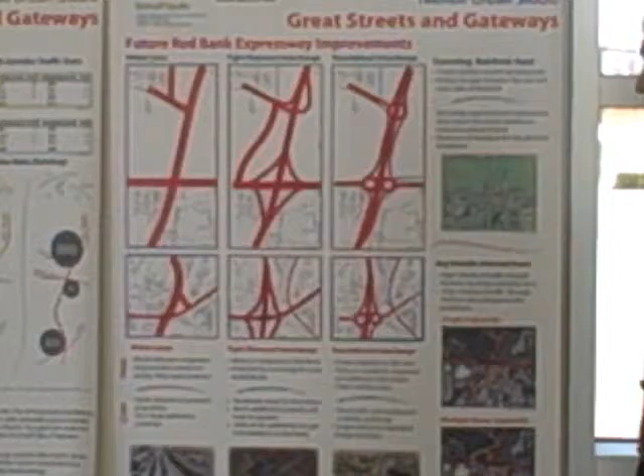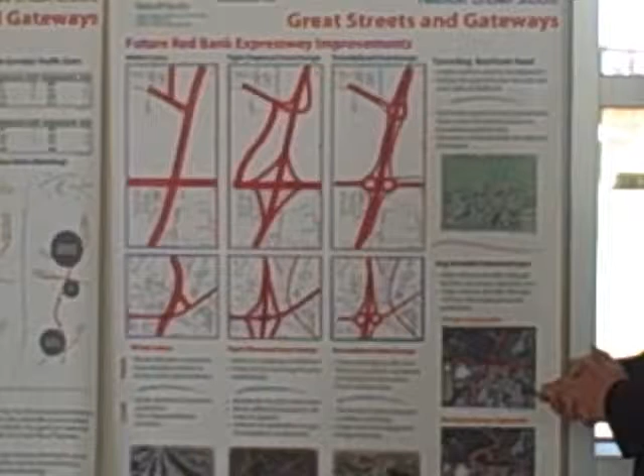With the grade separated intersection, it really becomes difficult to get those pedestrians across safely. Our final option that we've been looking at this quarter is the roundabout interchange. What this would do is add 3 different roundabouts, one at each of the different intersections.

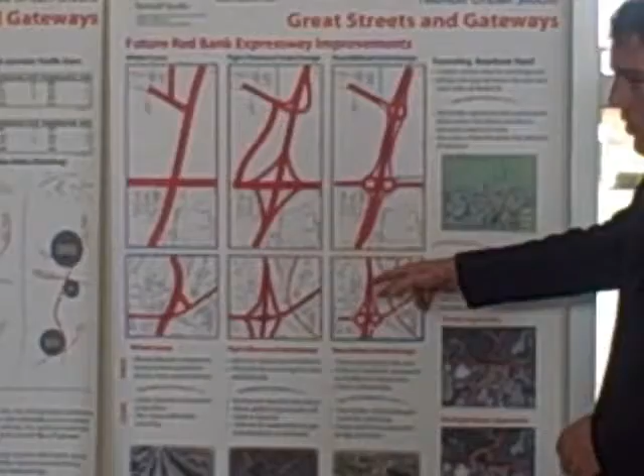And as you can see, we have a single roundabout, and then the Madison and Erie Road intersections utilize a double or teardrop roundabout. Just like we explained here, traffic from the north coming from 71 could access Duck Creek from here. In the PM, Duck Creek traffic can go around the roundabout and back up.

Any of the traffic coming from Duck Creek connects with what comes off of Red Bank to Madison here, and they can access Madison Road or free flow down through Madison Road. With this double or teardrop roundabout here, traffic can move freely through on Madison Road or access south, access north, and then from the other side as well.

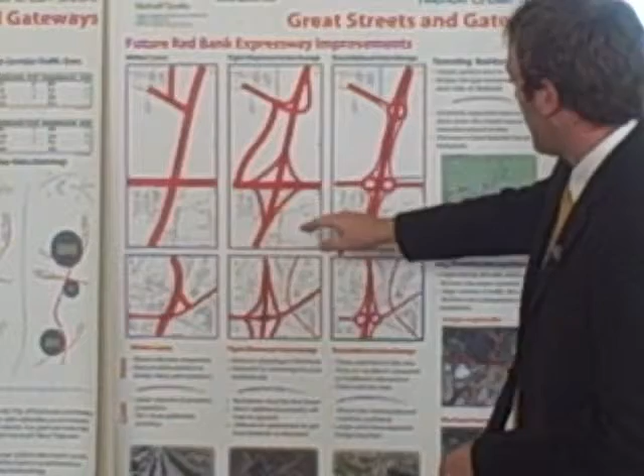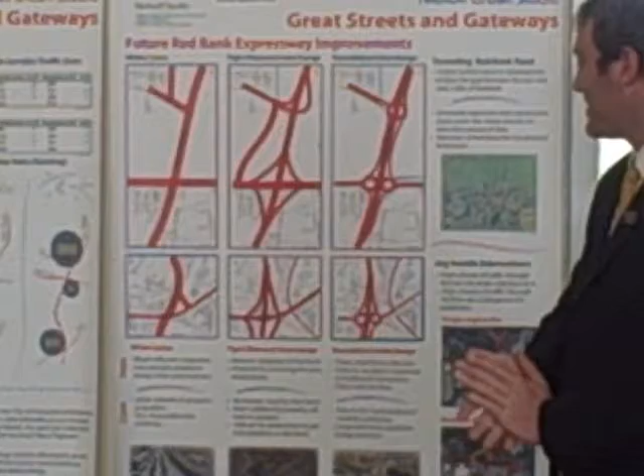And just like we see with the second option, this really gives you the opportunity for free flow through all the intersections. You're looking at the same thing also down here with Erie Road. One of the things that has been expressed about roundabout interchanges is that the community is somewhat reluctant to accept them. Basically, I think it's based on it being a new experience. It's something that people haven't had a lot of exposure to.

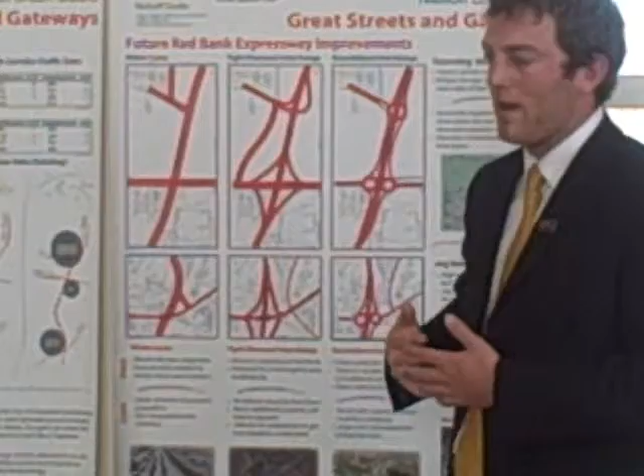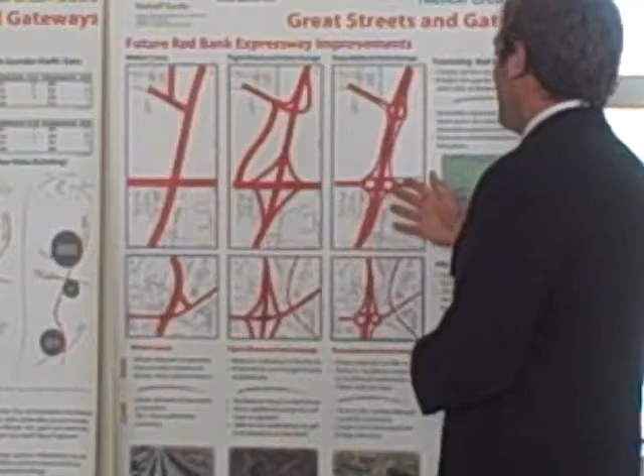And when you throw that at people, I think the initial reaction is to be a little reluctant to accept that. So that's maybe one of the cons against that. But really, I think that the roundabout would be a unique factor that would maybe give Madisonville something to rally around. It would maybe make them a unique community; people maybe are not drawn in by the roundabouts, but it's something that will maybe pull people out.

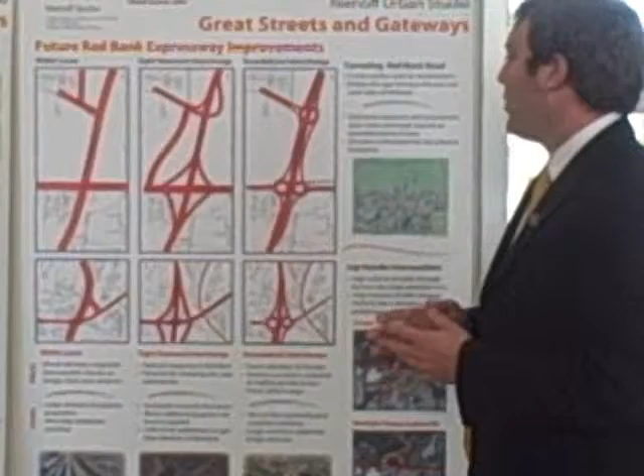Another con too, the same with the tight diamond interchange, is that when you're looking at grade separations, it's becoming considerably more expensive, even with acquiring the property, than just widening one lane. You have to think about the different property that you're going to have to buy, especially with this connector. There's significant property you have to purchase.

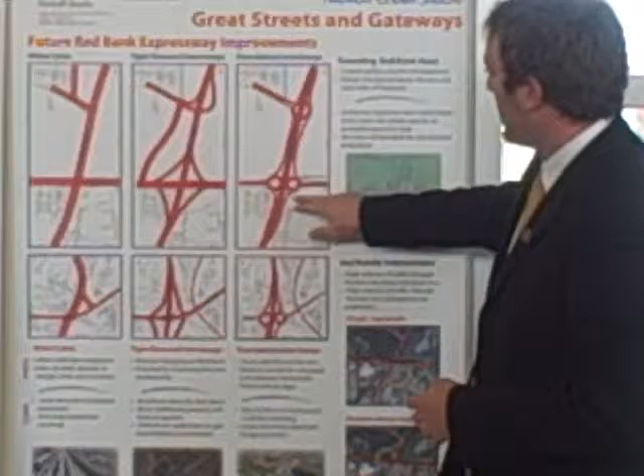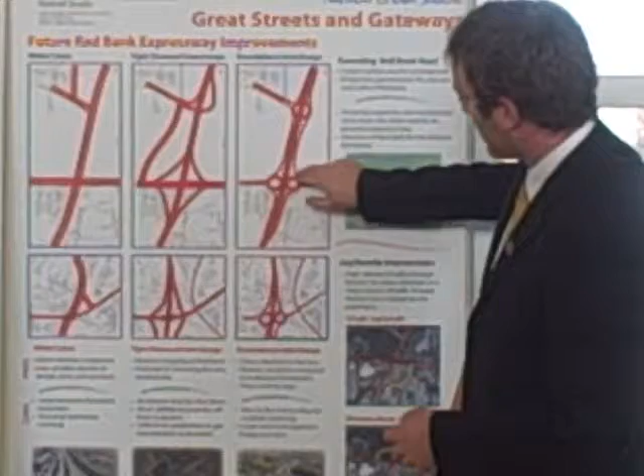But even here, with the roundabout, you're going to have to acquire property on all 4 corners of Madison Road. The reason we believe the roundabout is probably the best option right now is that the property is less in these different connectors than it would be with the tight diamond interchange. So it's a tighter footprint for those different types of intersections.

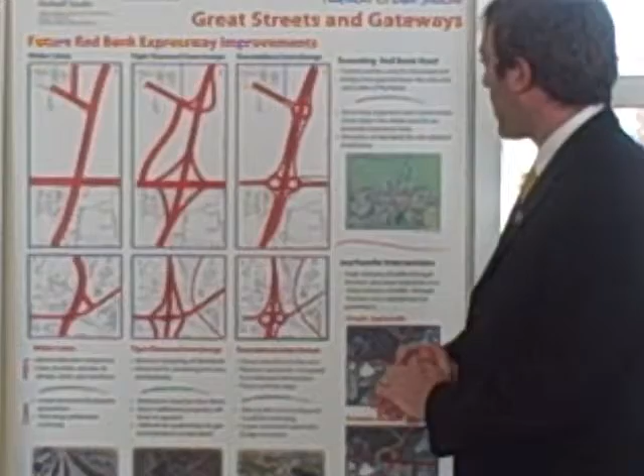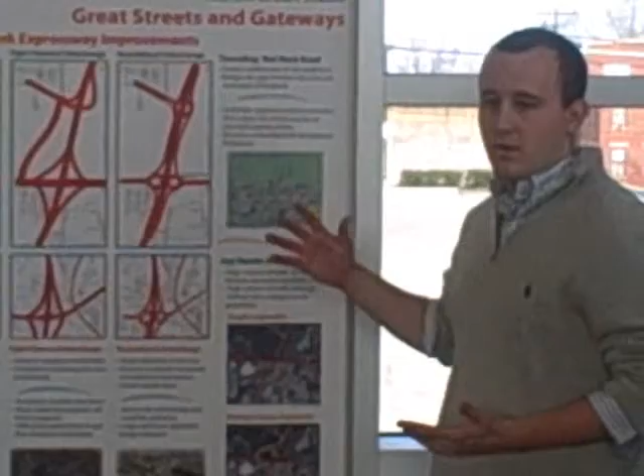So those are our 3 main intersections, and I believe Josh will be talking about some of the other options we looked at. Okay, as Jordan just mentioned, we covered 3 main options that looked at the whole expressway. And through different planning groups that were looking at the Newtown site, we more specifically concentrated on the intersection with Red Bank and Madison and what it would do to the Newtown site.

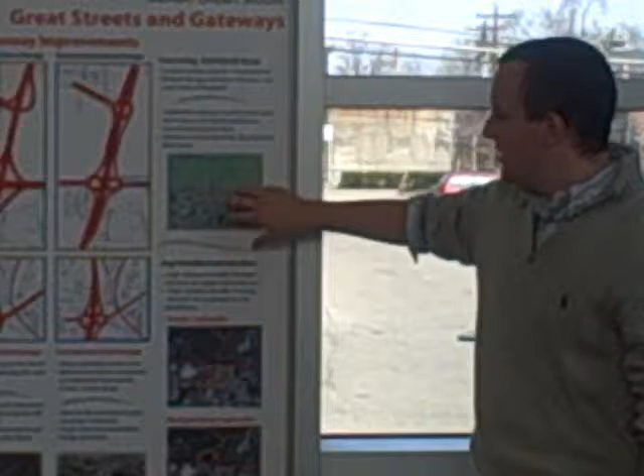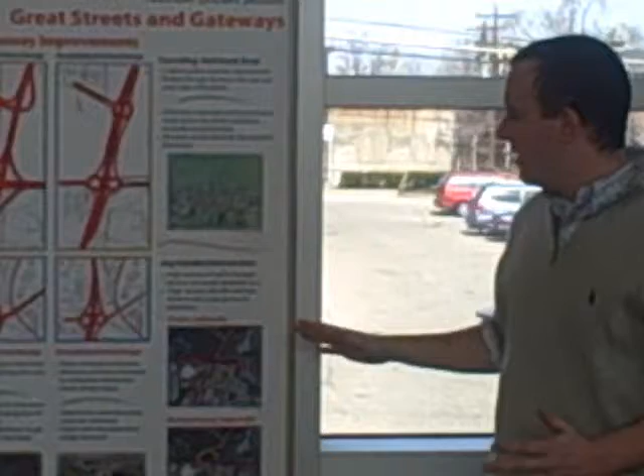So we communicated with them and got hold of a couple of their ideas, and we wanted to take a look at them and put our opinions down. The first option specific to Red Bank and Madison is tunneling Red Bank under Madison and reconnecting Old Red Bank Road. This option does a significant amount as far as planning goes. It starts to reconnect the old street grid, it creates a nice space, and it passes all the Red Bank traffic under there without really being noticed.

However, it's technically a tunnel, with safety issues and extreme costs. The elevation of Red Bank Road physically limits what you can do. You really can't lower Red Bank Road because of the culvert that runs under it.

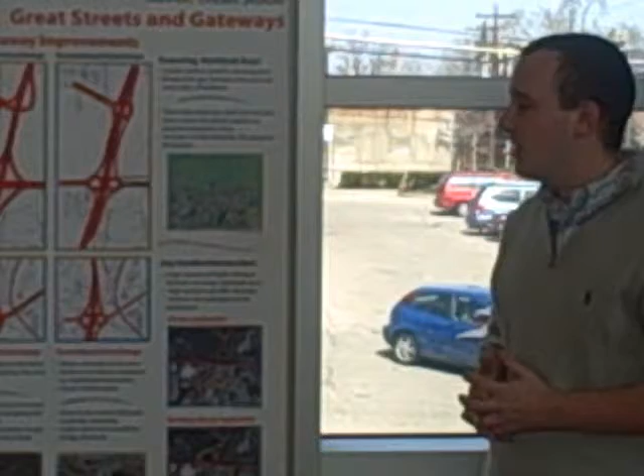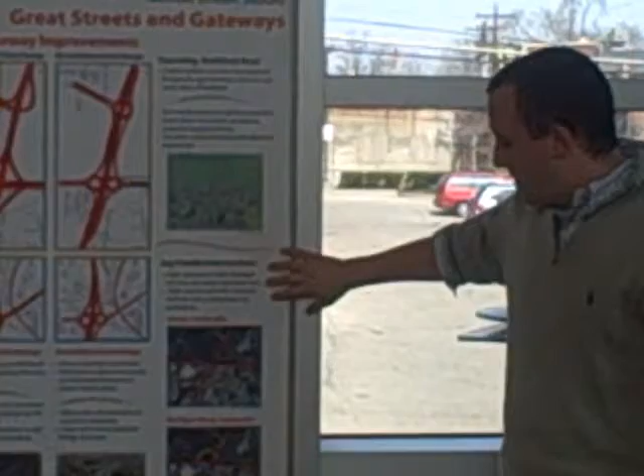So you would be building up that whole area. And we feel that the cost of that is pretty much a prohibitive action. We also were made aware of two jug handle options that some of the groups were looking at.

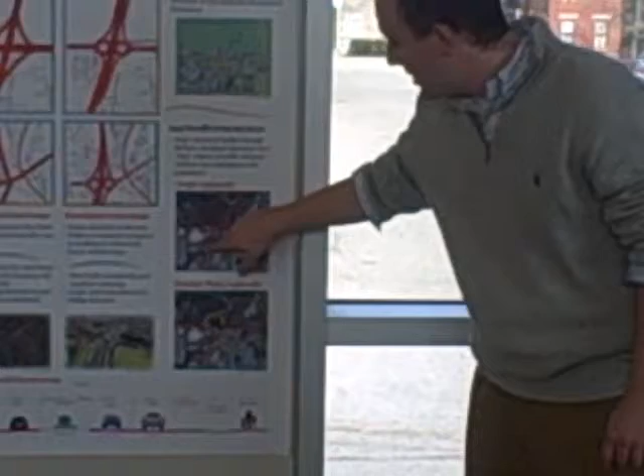The first is a single jug handle, which is extremely similar to what we looked at last quarter, that is going to be implemented at Popple Street, which essentially all the traffic wanting to access Red Bank Expressway would use the jug handle that would guide them through the Newtown site, bringing traffic to the Newtown site, which was their goal with the jug handle.

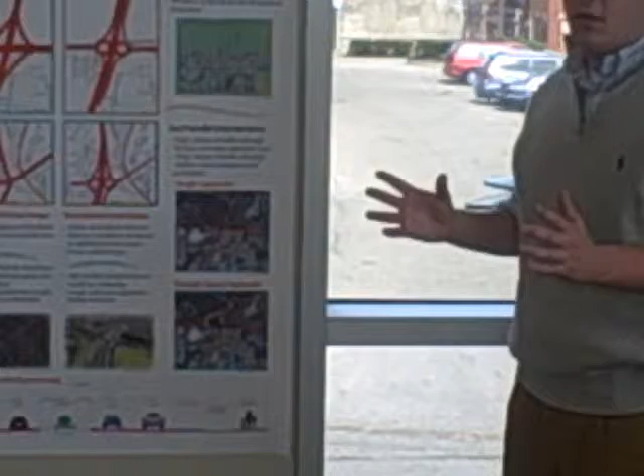However, we kind of feel that the problem is that you're essentially just moving the intersection from here down to here, and you're not really letting any more traffic pass through Red Bank Expressway than you would with keeping the intersection here. So also bringing an on-off ramp kind of mentality through the Newtown site we don't think is the greatest idea for pedestrians as well.

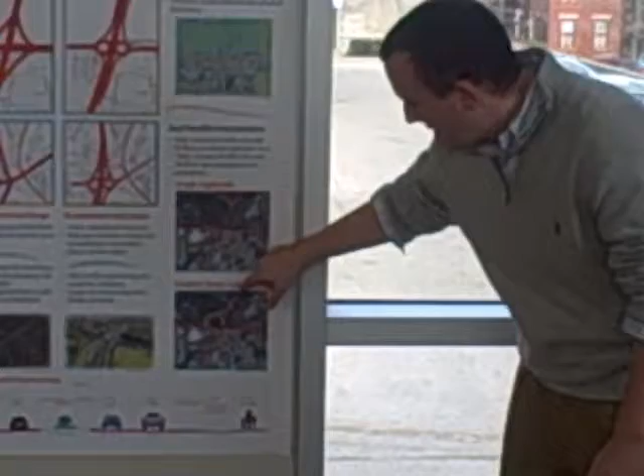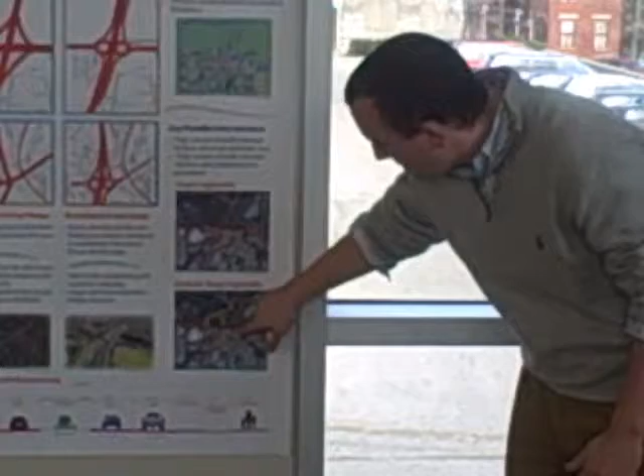The multiple ramp jug handle kind of creates something similar to a normal ramp system, except you only use up two of the four quadrants. Again, you guide traffic through the Newtown site, but you also end up taking up space from the children's home, and we know that that's a sensitive issue. They don't really want to give up their land.

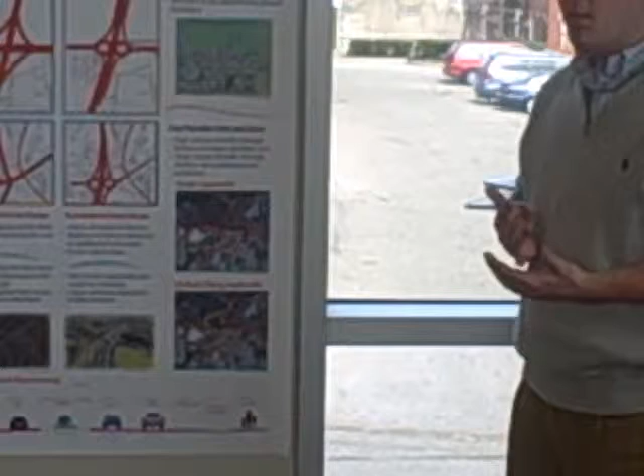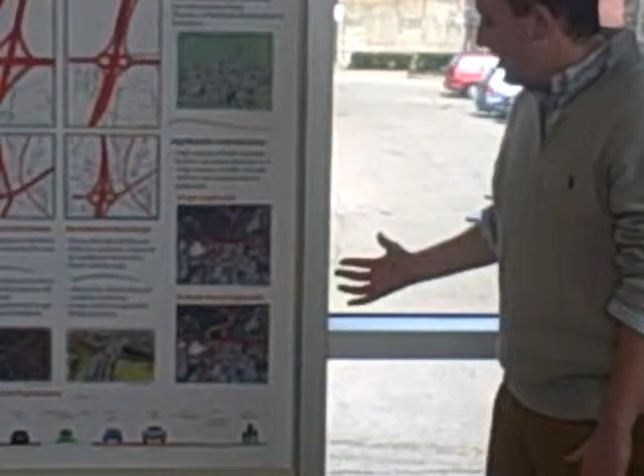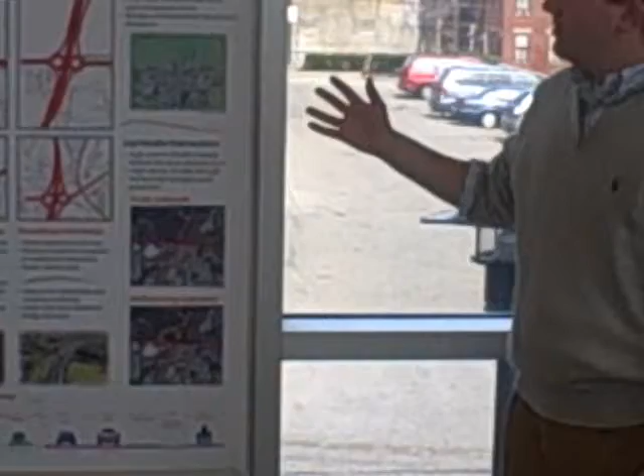And again, you have the same issue with pushing expressway traffic through a site where you're going to want speeds to be lower because of high pedestrian volume. So we really don't know about the viability of any of these options, but we did consider them. I think right now we're leaning more towards one of the two grade separated options for the whole system. Micah, do you want to, Justin?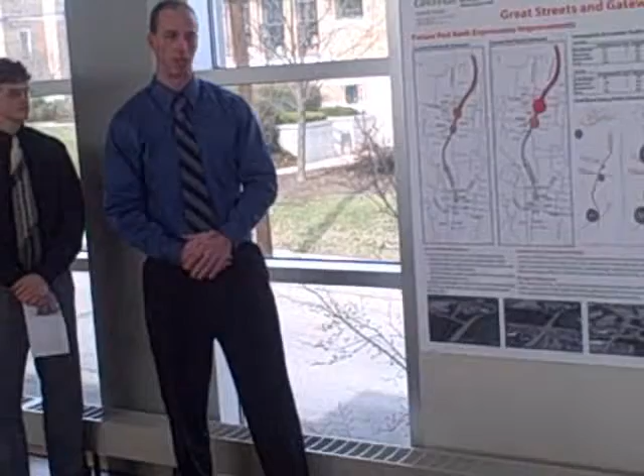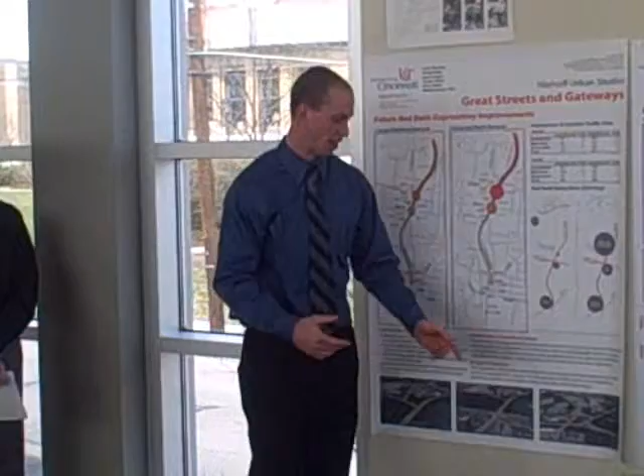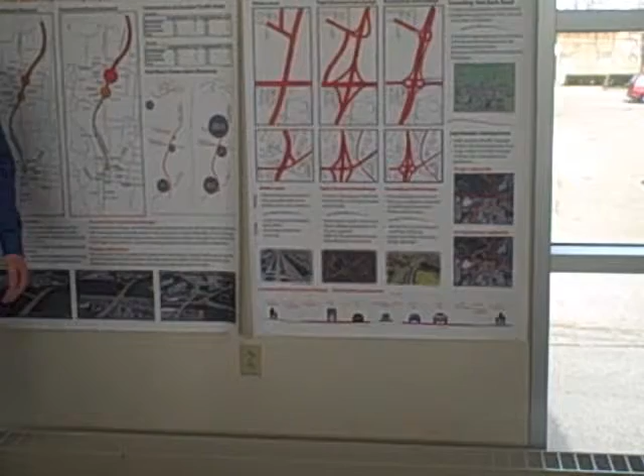And the last thing we took into consideration was what the community was looking for in this planning process. And the main thing was to not make Red Bank an expressway or a highway. And Jordan came up with a nice drawing here that shows sidewalks and a median with probably not trees, but maybe shrubbery and stuff like that to kind of give it a more town look instead of the expressway just trying to get from point A to point B, because there will be a lot of businesses along that way.

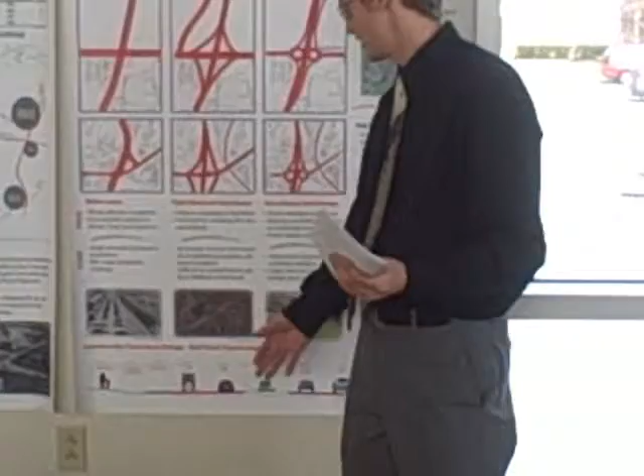Also, we think, with the bridge, there's a lot of different things you can do with that to make it look nice. You could use brick veneer, you can use a lot of different stuff to help that out. Yeah, just as you touched on with this cross section that you might see, this is Red Bank Road. Some of these things are optional, but they all are coming from comments we got from the city or suggestions to want sidewalks on both sides, drainage easement, and good shoulder sizes and appropriate lane widths.

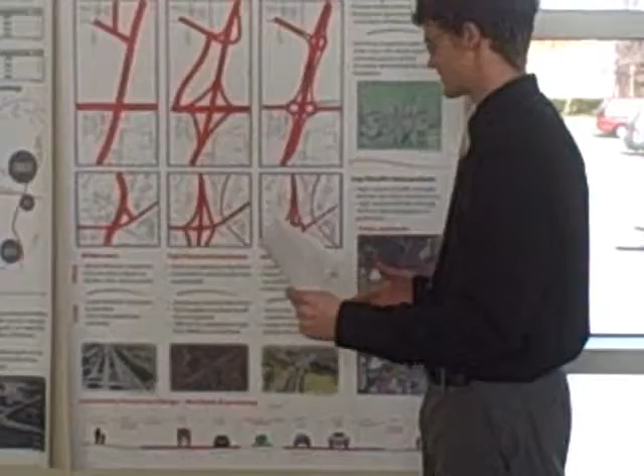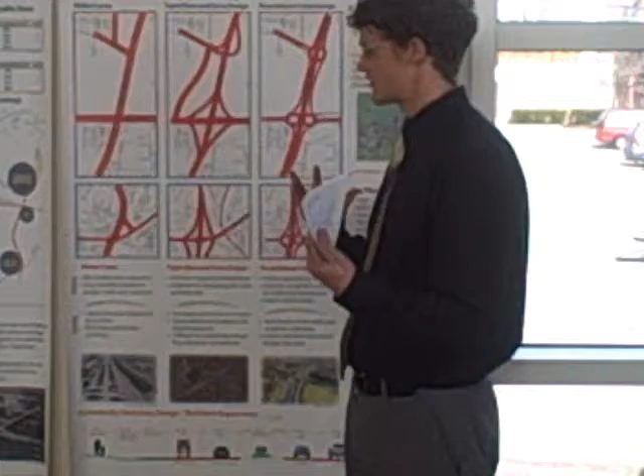So some of the sidewalks might not be necessary throughout the entire corridor, but this is basically the maximum footprint that we're considering in the design, 114 feet wide. So it's quite significant. Just looking at the preliminary drawings, it doesn't take up a whole lot more width than is already there, but it is significant, especially the farther you go south, you do take up more space and right-of-way acquisition. So, like we said, this is kind of our brainstorming, considering all of the ideas, different feedback from sources.

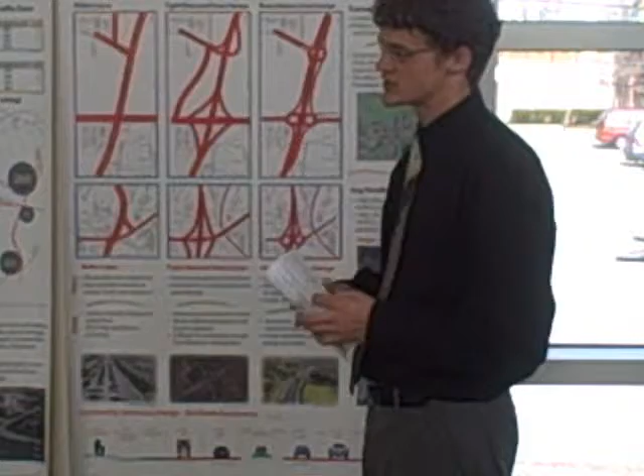Next quarter, we'll be looking at simulating the entire corridor, looking at the different interchange options, and using a different software package called VISSIM, and that'll allow us to get what we feel will be better and more accurate results, and be able to accurately simulate some interchange options that aren't available through HCS software.